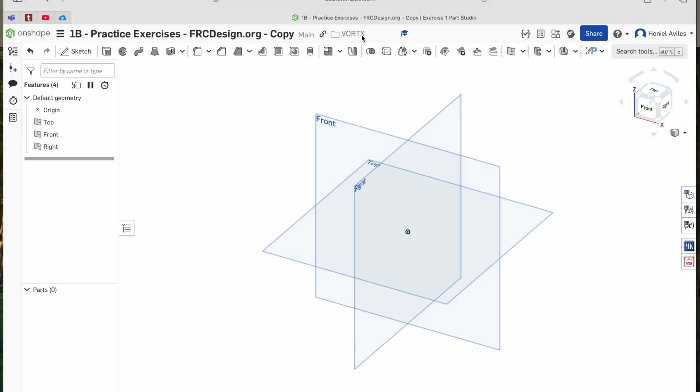As you can see, this piece right here could take a while, but I found the most effective way is by using the mirror and tangent commands to make this part not too difficult. Honestly you go pretty quick once you understand how to use the really quick features.

Let me get right into it. What you want to do is start a sketch on the front plane. We're going to be using gears right here. For gears to actually mesh well, you have to calculate the distance apart from them. You're thinking, how do you calculate it? That might be a little difficult, but since we're using CAD, you could just have them touch at the tangent, and the tangents when they first intersect, that's where they're going to start meshing.

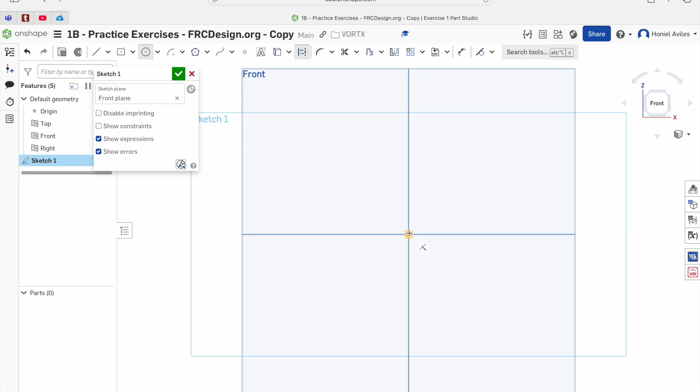So how do you actually use that formula? You're going to want to pick show expression, and then get yourself a center point circle. Make sure you have construction on because it's just a reference for us, and we'll pop it right here. The formula for this to get the gear in is you want to take the number of teeth it has. We're going to be using a 60 tooth gear, and you always want to divide it by 20, no matter what gear it is. As you can see, we have a diameter of 3. Even though we could have run a diameter of 3, this makes it more streamlined so you understand, hey, that's a gear right there.

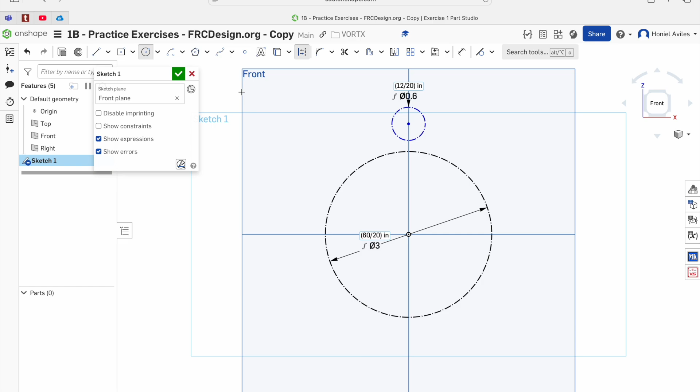Next thing you want to do is make the little gear right up here. Make sure we have a vertical constraint just by going up across the origin. This is going to be a 12 tooth, and you always divide it by 20. So that right there is now our 12 tooth gear. As you can see it's blue, and we don't like that, so we're going to use our tangent command. We're going to select this and this, so now they intersect at one point, making them mesh. That is exactly what we want right over there.

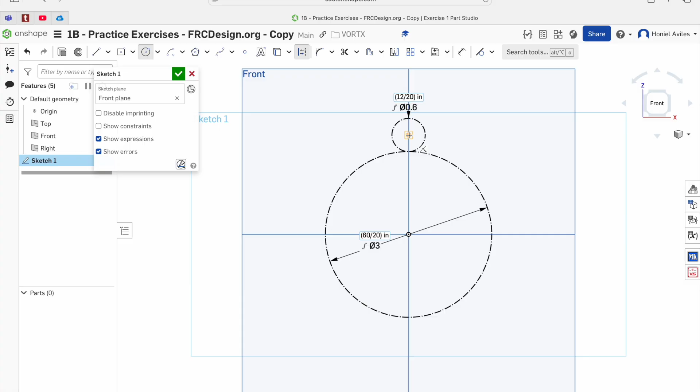Next thing we want to do is get ourselves another center point circle, and we're going to make this construction as well. Right where we have the 12 tooth gear, we're going to extend this out and have this be 2.5 diameter. This is going to be for the motor, just a motor hole so we could mount it, and a reference for us. Once that's done, we're going to check mark this and create another sketch, this time on the front plane as well, using the dimensions we just made as a reference for this sketch.

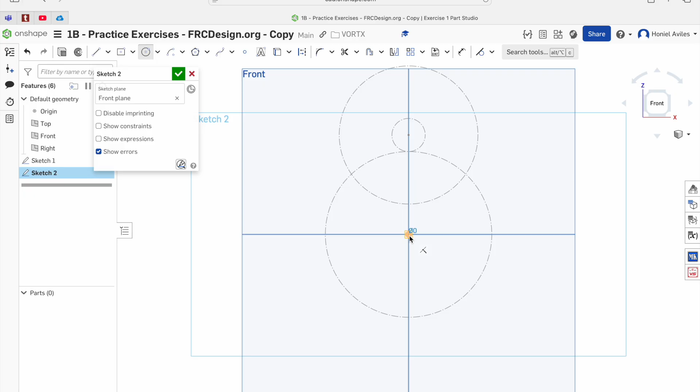Next thing we want to do is go over to center point circle again. We're going to be using a lot of them in this exercise. We're going to press it, and this diameter in the middle of the origin is going to be 1.125. That is going to be for the bearing, and we're going to have another one on the top. This is going to be for the motor boss, and if you don't know what the motor boss is, it's just the little thing that sticks out of the motor that actually makes it turn. We're going to have a circle right over here, and make it 0.8 for the motor boss.

With that, those are now defined. Next thing we want is a center reference for the motor mounting points. We know the motor is going to have some mounting points right over here, but to reference that, we're going to do another center circle with construction geometry this time, and we're going to have this be 2 inches in diameter. With that out of the way, we have the reference for us to actually make the little holes.

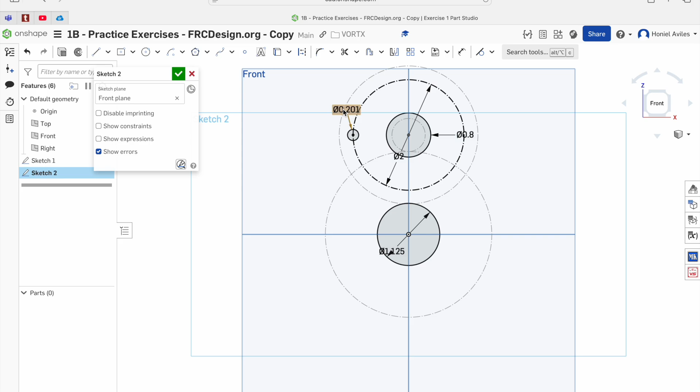And that's really good because it kind of cleans up the area, because I'm not actually having to dimension that, because there'd be another dimension over there. So it just makes it way cleaner and way more simple. And you're going to see when I continue this part, it's going to get so much faster because I'm using mirror.

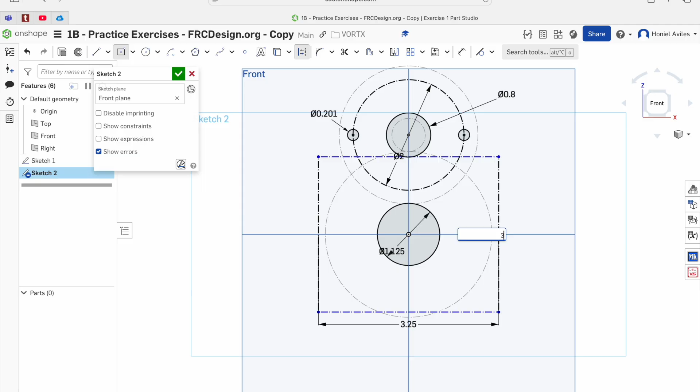So with that out of the way, now with the mirror command done, you want to go over to a center point rectangle now. Make sure this is construction geometry, as it's going to be the reference holes for the actual mounting plate. So we're going to plop this right over here, and we're going to want both these to be 3.25 and 3.25. Alright, that's exactly what we want.

A good thing I'll do sometimes is just move these dimensions around just so it looks cleaner for you to see and just cleans up the CAD a bit. So we're gonna go over to center point circle and we're gonna press this right here and same thing, 0.201 inches in diameter. And let me just move that real quick. It's kind of hard to see.

Okay, so this is where mirror comes in clutch. So I'm gonna come down here, go over and mirror this right here. So we have that, and I'm gonna cancel it, go back to mirror this vertical line, and now just click these two. And that just saved me having to dimension all those separately. So that was very nice with the mirror function.

And with that out of the way, we're gonna want to go over to a center point arc, and we're gonna start it right over here and just extend it. Make sure there's no constraints. You don't want any constraints as of now. And you're gonna have this to be 3/16. Remember, Onshape automatically converts that to decimal, so that's really nice. I'm gonna switch over the dimension to be down there just to clean it up a bit.

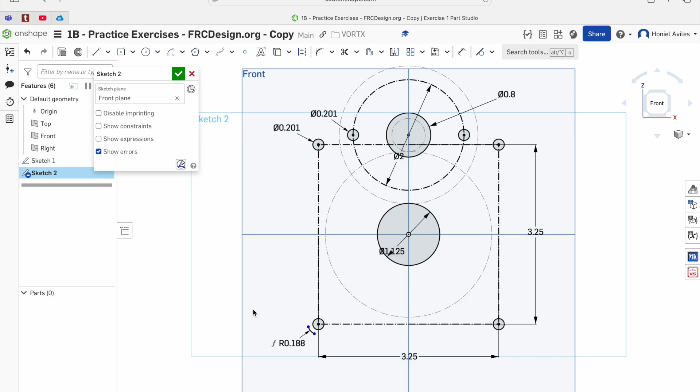And this is again where mirror saves the day for us. I'm gonna use this mirror tool and mirror this line over. So now that is mirrored, which is excellent. I don't have to dimension that. And now we're gonna create a line right over here so it can connect these two. And I'm gonna escape because we don't want to dimension that. And we're gonna use tangent on these two lines. As you can see, they're now fully constrained.

Next thing we want to do for the other side, now that we have that constrained, is just click the vertical line right over there and click all the parts we just made. So now, as you can see, everything is fully defined on the other side with minimal effort, which is exactly what we want. So with that out of the way, now we're going to make a line at the bottom right over here to just connect these two points together.

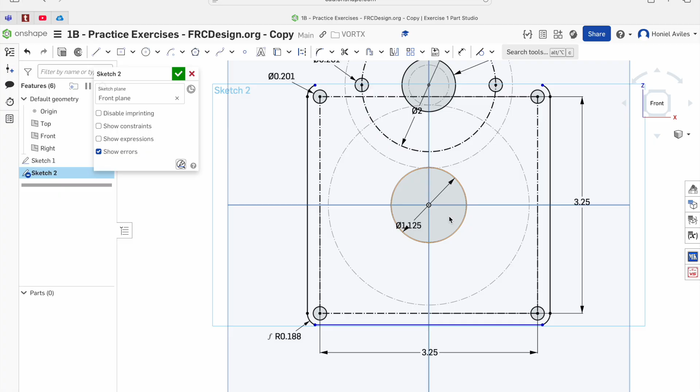And no dimension again, but now we're gonna make the top, and the top can be a little challenging, like, oh, what reference do I use? But what we're gonna do right here is connect these. We're just gonna make a reference, make sure there's no constraints here. So we're gonna have that right there, and we're gonna create another line. I'm gonna use quick hotkeys. Hotkeys are really nice. Make sure you start using them. It's gonna make your CAD super quick.

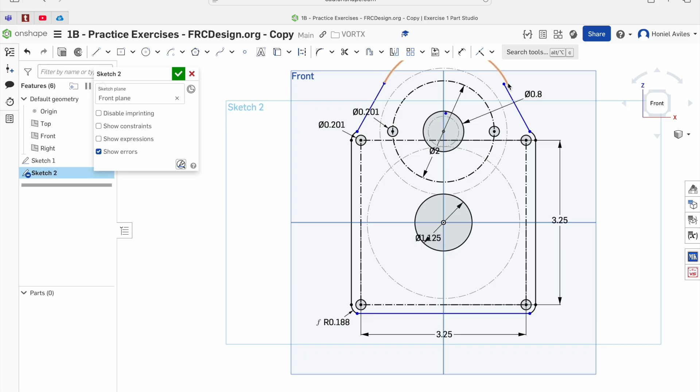And sadly, center point doesn't have a hotkey, but we'll just plop one. No, I don't want that. Actually, I'm gonna plop this right over here. So there and there. Perfect. So now we're gonna make this concentric with these two, and again concentric with these two. Oh, that would not make it concentric. Concentric with these two. Perfect. So now to actually define this how we want it to be.

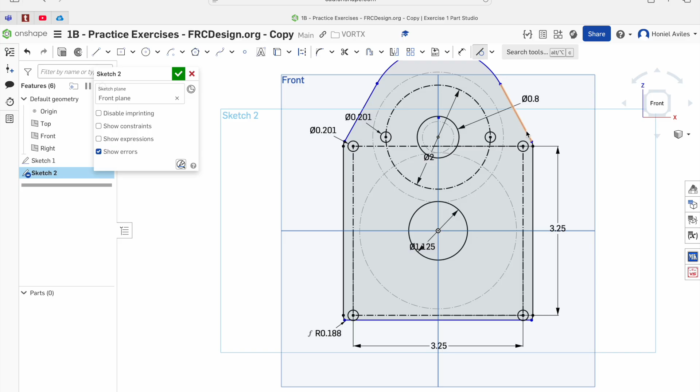I'm gonna come over here to tangent, make this line and this line tangent, this line and this line tangent, this line and this line tangent, and right down here, that line and that line tangent. Now it is still blue, and to fix that we're gonna go to concentric, this dot right here of the arc to this dot, and that's going to make it concentric to that.

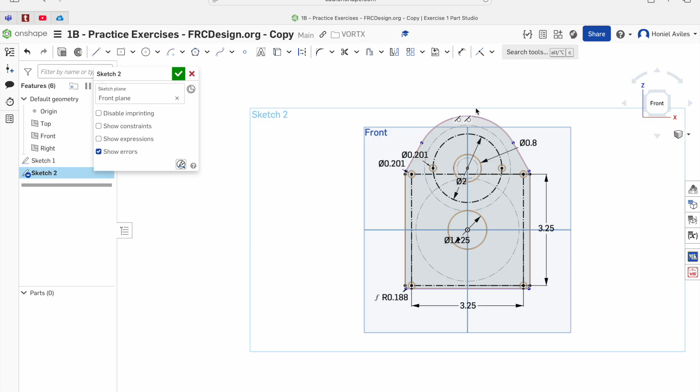And lastly, we're going to come down here to these points and move it in to make it concentric to here. And as you can see, everything is now fully defined and is looking really nice. So that right there is all you need to do.

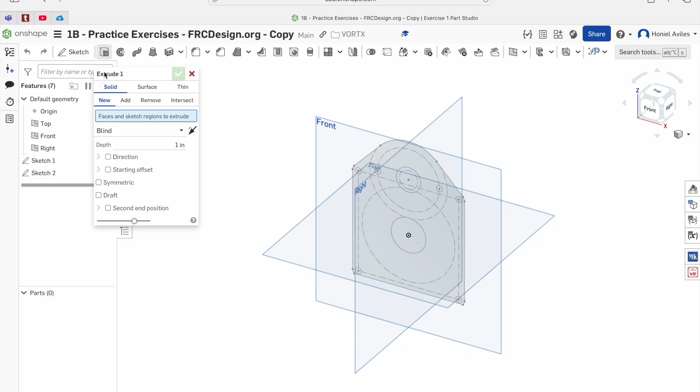So that right there is going to be our motor plate done. So we're going to check mark that and press extrude. Just press the sketch so everything we just made is going to get extruded. We're going to want an extrusion of 1/4 inch. And with that extrusion, we just check mark, there. That is exactly what we want, so that is looking perfect for us.

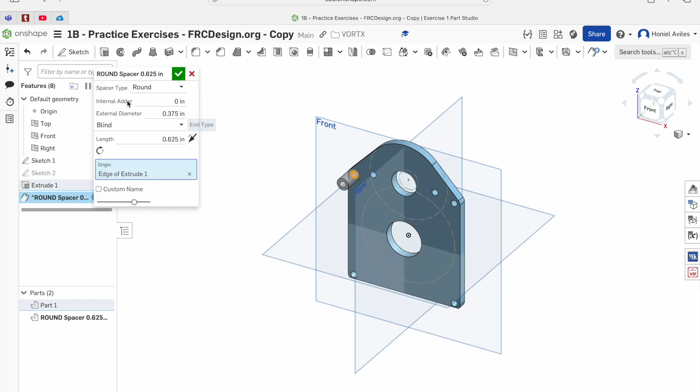So next thing we're going to do is get the spacer FeatureScript out and use this. We're going to have it so the external diameter is going to be 3/8, as you can see right there, and the length we're going to want it to be 5/8. With that out of the way, we just press the little circle right over here so it makes the spacer for us real nice and easy, check mark that, and our spacer is now complete.

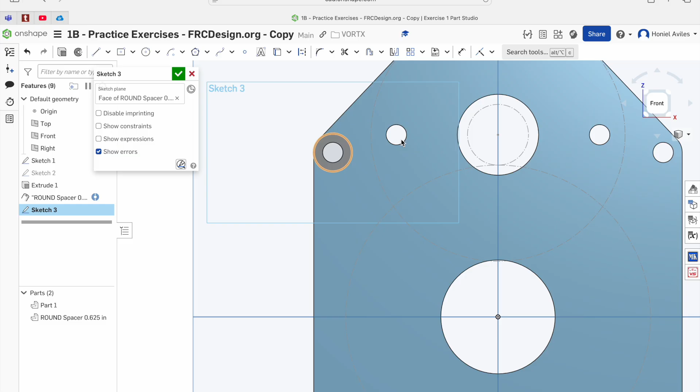The next thing is going to be the actual front plate, and the front plate can look a little bit tricky, but with the features up at the top, it makes it really easy, especially this one right over here. So I'm going to click the front of the spacer and start sketching from there, and we're going to use the use/project/convert, which uses all the dimensions we just made. I'm going to press the whole entire plate, and it's going to project everything we just made. An amazing tool, very nice.

And make sure while you're here to project all these corner holes to the side right over here. So we project all of these. Make sure to project the middle one because we'll need it. Then we press escape. Now, we're going to delete all of these because we don't actually need them. And make sure as well to click that point and delete the constraints, because we don't want to use the constraints that are on that point. So come over here, delete that.

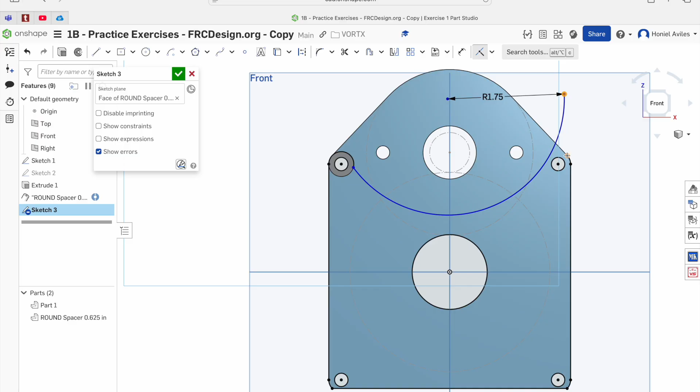Now, with that out of the way, we can finally come over to center point again, and we're going to use a center point arc. I'm going to make it right over here, something like this. This is going to be 1.75 in radius. Now we come over here to concentric, and we're going to make this point concentric with, oh, I didn't click concentric. Make this concentric to this point right over here, and make this point concentric with this point right over here.

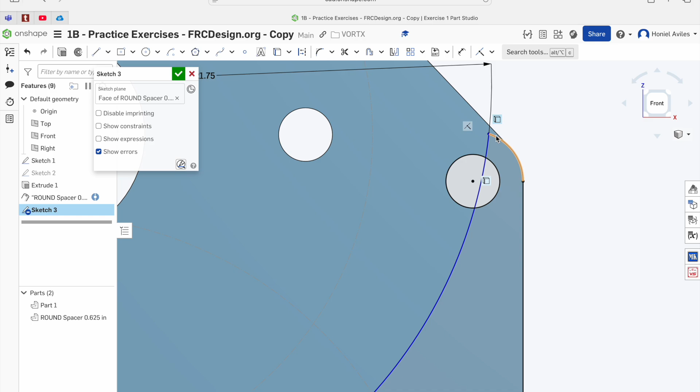So with that now, I could, oops, sorry. Oh no. Yeah. Okay, that's better. Hold up, let me fix it. Sorry about that, guys. Over here. Okay, so over here in the front, I was meaning to move this a bit. Let me zoom in. Yeah, that's what we want now.

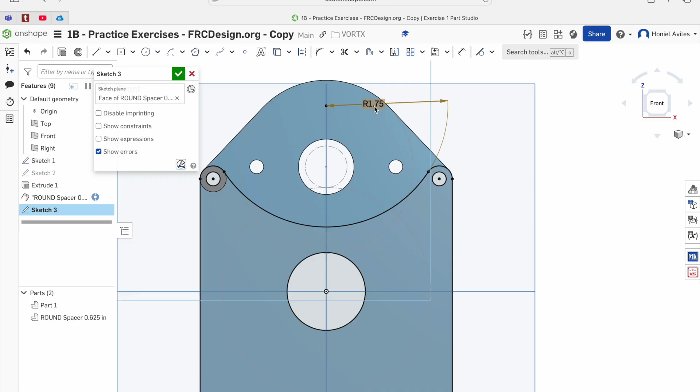So with that out of the way, we're gonna make these two tangent to one another so that we can fully define this. So this will be tangent to that, and this tangent to that. As you can see, everything is now fully defined just the way we want it. I'm just gonna move this and clean it up a bit. And that is now exactly what you want.

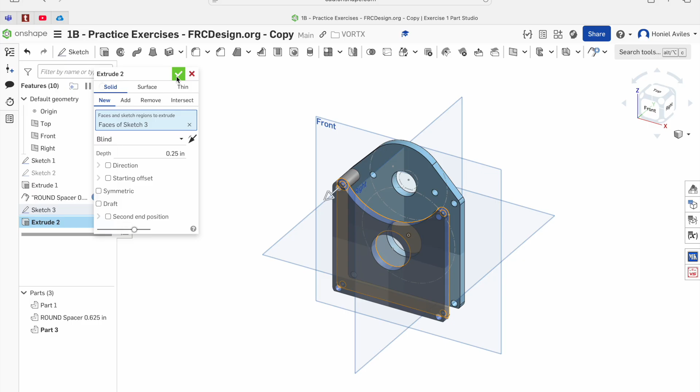So we're gonna confirm this sketch, go over to extrusion, select the sketch, and extrude this, making sure it's new, not add, so it's a separate piece. Then we make this 1/4 with the green check. Yep, twice, and there you go. That is the part right there. So one thing to make sure you do. Oh, oops, almost forgot something.

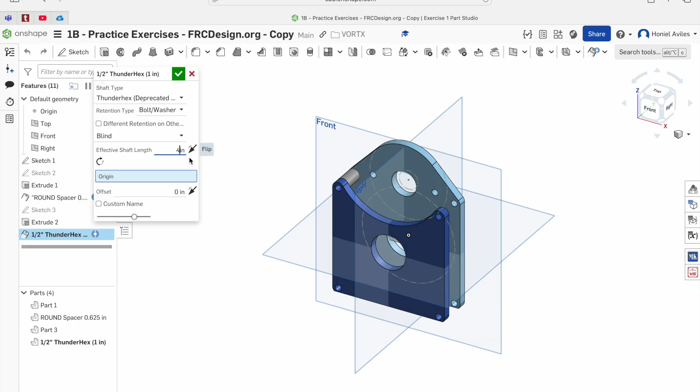My bad. We're gonna make a shaft with a shaft generator, so we generate the shaft down here so that the motor is actually rotating something. Make sure it is ThunderHex, this third one, not 3/8 ThunderHex. I did that once. We need this because it's gonna be 1/2 ThunderHex. Make sure this is bolt and washer, and it can be blind. Make this 4 inches, and start it right over here at the beginning of this hole. Click it, it goes the wrong way first, so flip the axis, and voila, that is complete.

So one more thing I highly recommend you do is rename this. I'm gonna rename this to motor plate, and oops, my spelling is bad. Sorry guys. Motor plate, and we're gonna rename this to outer plate.

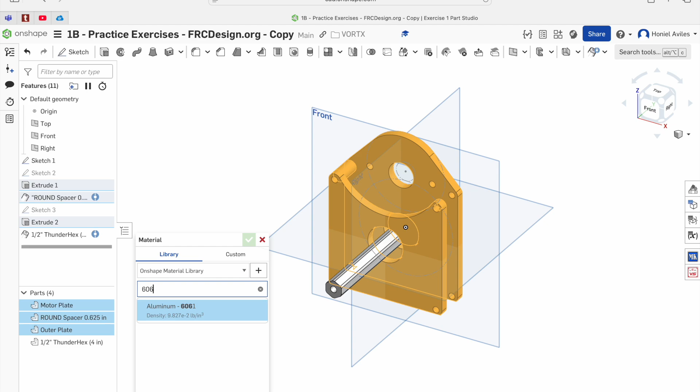And the last thing you guys want to do before you go to the assembly is click all these three, not the Thunder Hex because it already has a material assigned thanks to the shaft generator, assign material, and make sure we come down here and it's 6061 aluminum. Just press it right there and hit the green check. And with that, that is your part fully complete, and I'll be right back to do the assembly with you guys.

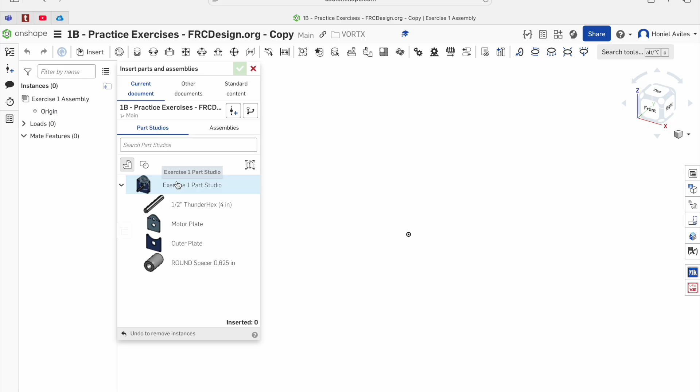Alright everyone, I'm back and I'm ready to do the assembly. So what you guys are going to do is go to your assembly page and go to insert and make sure you're at current document, and you go to exercise number 1 part studio. Ooh, kind of far actually, hold up. So you could zoom in and just place it really well, kind of next to the origin. So make sure you check mark that.

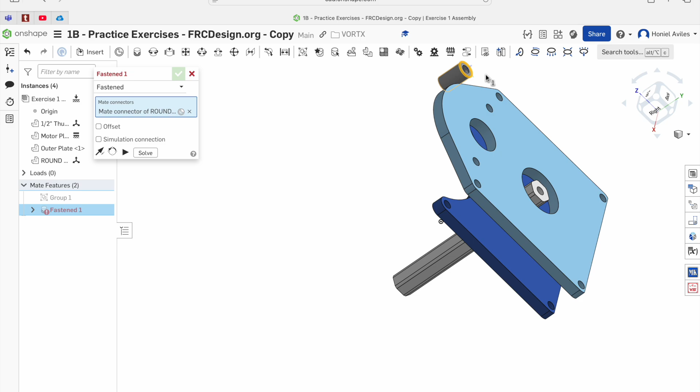And the next thing you want to do is right click on the motor plate and make it fixed, because that's going to make it so it doesn't move at all, and we don't want anything moving. The next thing we're going to do is group these two just so that they'll always be together like so. And now you're going to move this spacer so you can mate it. Make sure you press the mate, or I just use hotkeys. I just press M to activate it. You're going to mate the side like so with this side.

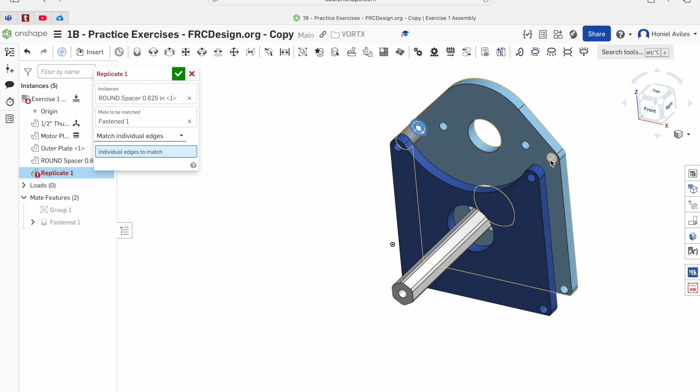So now that's mated. Now you could copy it, paste it, and mate all three individually, but like I said before, I'm trying to make it easy and streamline it for y'all. So you're gonna want to go to replicate, press the spacer, move it to match individual edges, and you're gonna click each one of these so that it just mates it and creates one for y'all, like so. Real easy, real nice.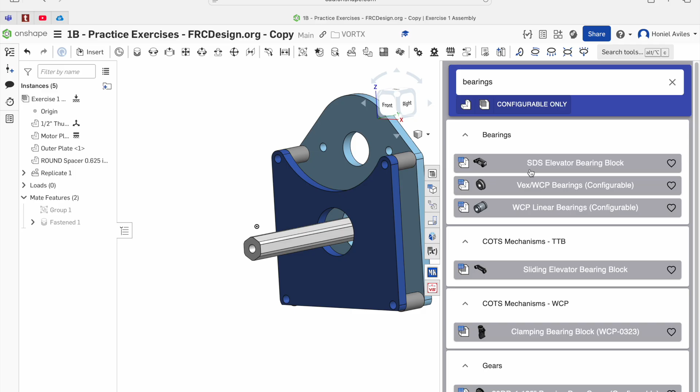So next thing you guys want to do is come over here to MKCad and make sure to put configurable only and type in bearings. We're gonna want the Vex and West Coast Products bearings, and we're gonna want the third one, 1/2 Thunder Hex, which is flanged. So we press that, go ahead and insert, and then now press it, go over here to copy, and then make sure to paste it, like so.

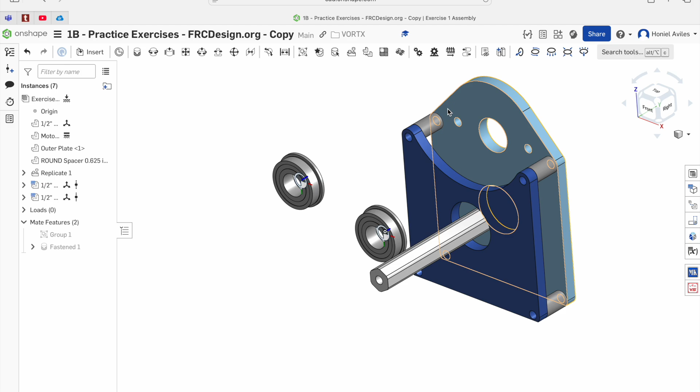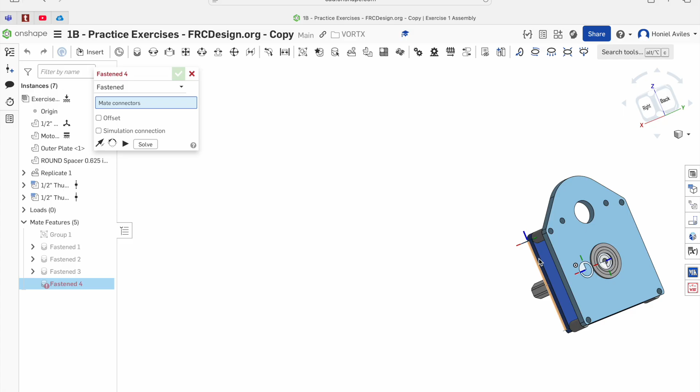So with that out the way, now we could actually mate these. I'm gonna use the hotkey to start the mate command. Gonna come over to that edge, come to this edge. So now that is mated nicely. Now I can go over to this edge and then click this edge, flip it around, and now that looks good, like so. Now keep the command open as you want to grab this edge and this edge so that the axle is now mated into place, like so.

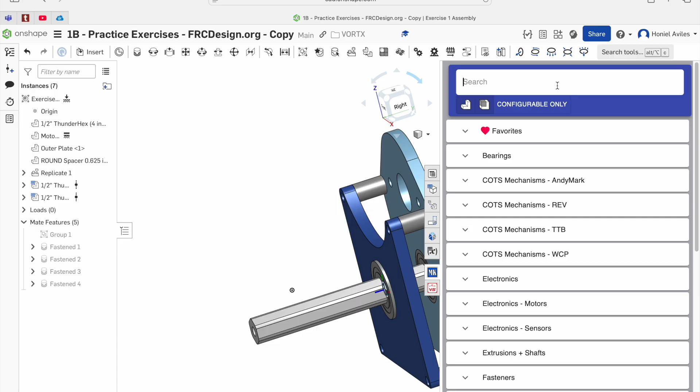So the next thing we're gonna do is get our motor. Now it seems like it might have been a while since they updated the motor they use in FRCDesign.org, because when I go to Falcon, there's not really the simplified one anymore. It's just V1, V2, V3. I've seen that V1 works better to represent it, so I just use long and make sure it's simplified with both Vex Pro on.

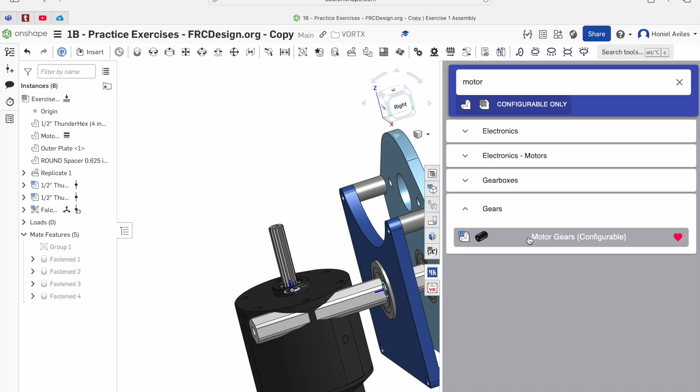So go ahead and insert that, and then the next thing you guys want to do is go over here to motor. Make sure to select configurable only and go to the gears. And you see we have Motor Gears right here. We want to go down all the way to where you see Falcon 20DP 12 tooth steel. So we go over here, insert that, like so. And now we're going to start mating.

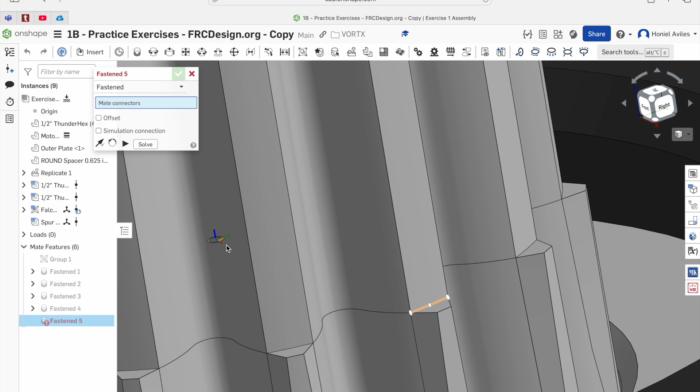So here is the part right here. You guys want to come over here to that line. You're not going to press the mate right here. You're going to hold shift so that you could mate it to the center. So now you have that mate. Come over and go to one of these faces and press this to the center. Now it's mated together. Make sure to flip it so it actually looks nice. And like so, that is exactly what we want.

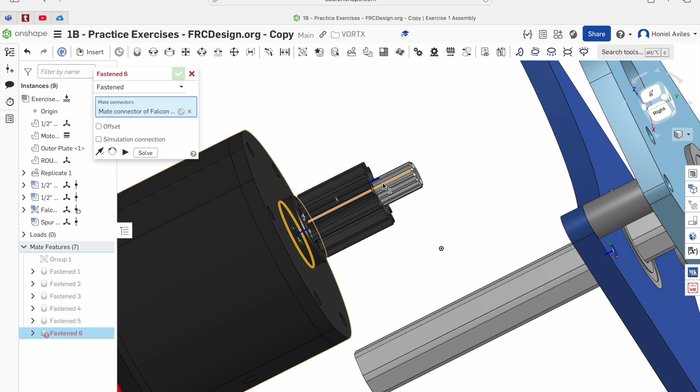It's looking good. So now we press this edge of it so we could mate it to this edge, flip it around, and now as you can see our motor is looking nice in place. So that is what we want. And now we're going to come over to MKCad once again. Going to go over here to spacer, configurable only, and all the way down to Vex hex spacers.

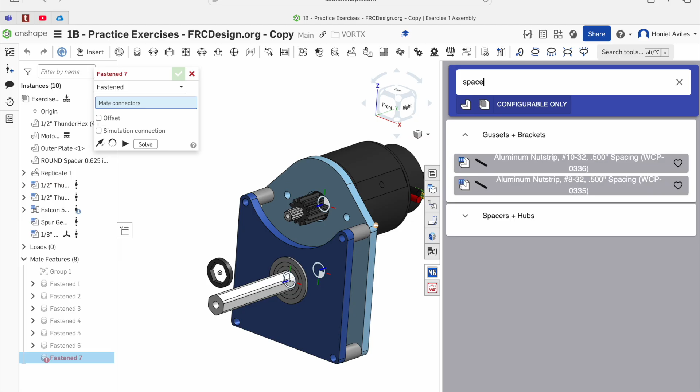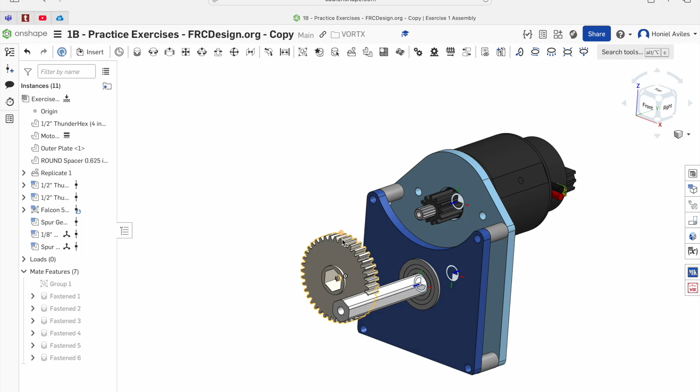We're going to make sure this is 1/8, and we're going to go ahead and insert. And then now for the gear, we're going to go over here to gear, make sure it's configurable, 20DP, and then come all the way down to 40 tooth. Now, you might be wondering, wait, I thought you said you were going to use 60, and that is true, but I'm here to show y'all something, just in case a mistake happens, or you're just wondering.

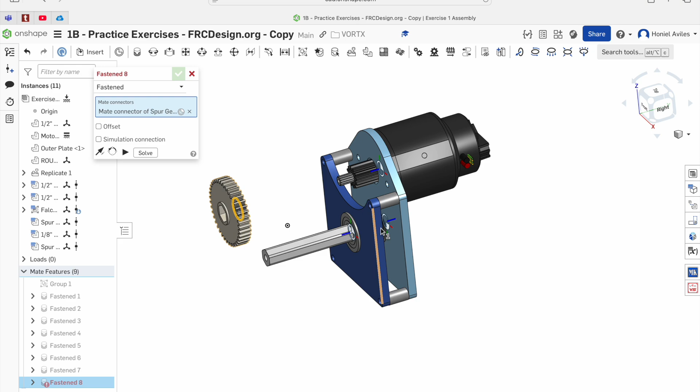So, we're going to come over here to mate, grab this edge right over here, and mate it towards the edge of this bearing, like so. So, I'm going to check mark that right there. I'm going to come over here to the edge, and I'm going to edge that gear right over there to this spacer. So that right there is looking nice.

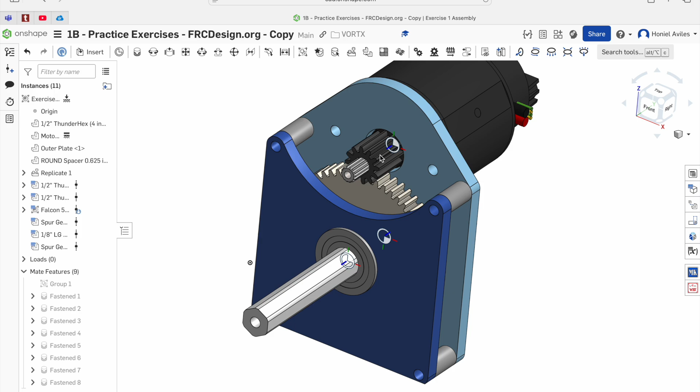And the thing I wanted to show you specifically is, as you can see, these are not meshing, but what you could do is if you right click, go over to change configuration, you could switch this, come all the way down to a 60, and with that, you just click confirm. And with all the dimensions we did, those two are now beautifully meshing. So that means all the dimensions we did are correct and looking nice.

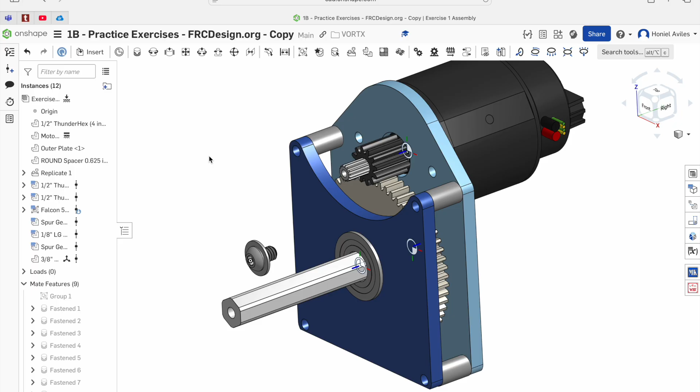So now to actually bolt this whole thing. We're going to go here to McMaster-Carr once again, and we're going to go over here to 1/4-20 bolt and washer. Just select that right over there. And we're going to mate this to the axle so that it can't slide out in the actual design. So come over here, click that, flip it around, check mark it, looking nice.

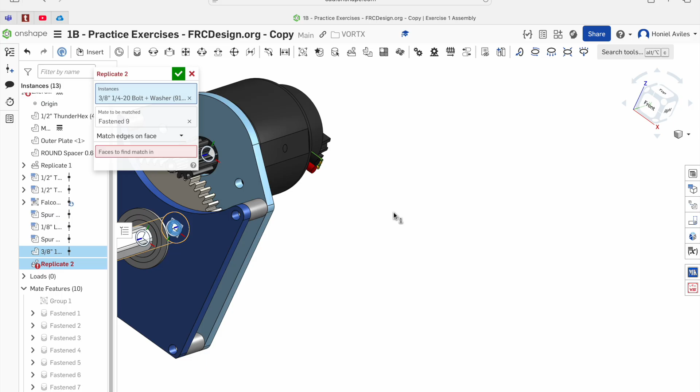And same thing as before, we're going to go to replicate, click the application. This time you could have match edges on face. That is perfectly fine for this one, as we just come down here, select this, and bam, that is done. So that is complete.

And now for the last part, you want to come over to insert and go to insert standard content. This will be all your screws and everything, just all the regular stuff I usually use on a day-to-day basis on mechanical. So we're gonna make sure that we are in socket head cap screw, like so. Make sure you're in #10-32 and both the thread and length are 1/2. Make sure these things are all the same as mine. Go over here to insert.

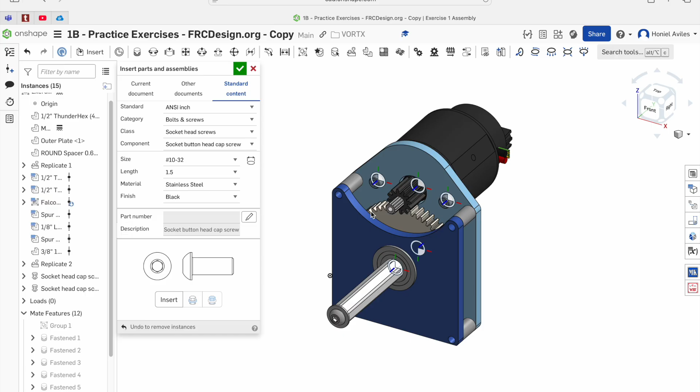And what I really love about this is that it automatically will show the mate for me. So I could just come over here to insert and just go right next to where I want it, and it will automatically mate it for me, which saves me so much time. So with that now, we could come over here to component and switch over to socket button head cap screw, which is what we need for the other ones. So make sure you're 10-32 and the length is 1.5. And now you're going to insert this right over here on the edge, like so, and check mark that, as that's everything we need for that moment.

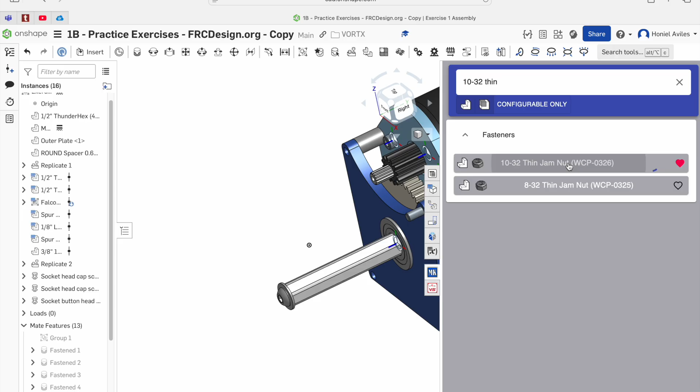So now we're going to go to McMaster-Carr one more time. Go here to 10-32 thin, I should say. Yep. You're going to insert this thin jam nut. Go over here to mate once again. Fasten mate this. Mate the bottom of it, like so, into the top of that plate and make sure it's forward. So now the nut is connected to the actual screw.

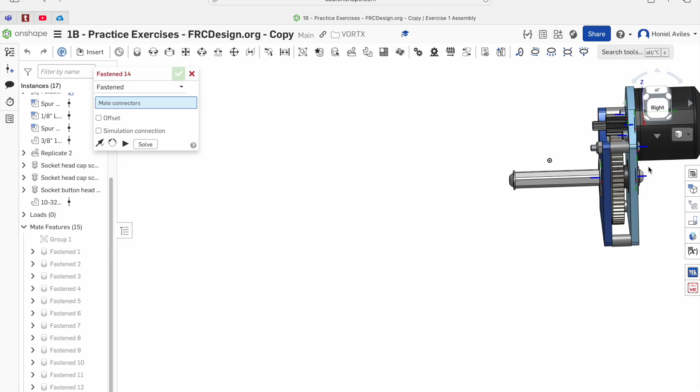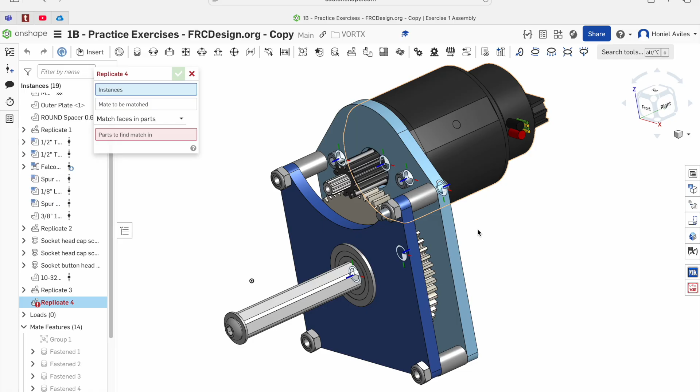So with that now, we could go over here to our good old friend replicate. We press replicate right over here. We go over here to match individual faces. So now with the nut we just pressed, we can just tap it over here and each one is getting replicated, so it saves us a ton of time. And last but certainly not least, we just go to replicate one more time, press the screw, make sure to press match individual faces, and hopefully, yep, it's working. And right over there, that should be the last screw.